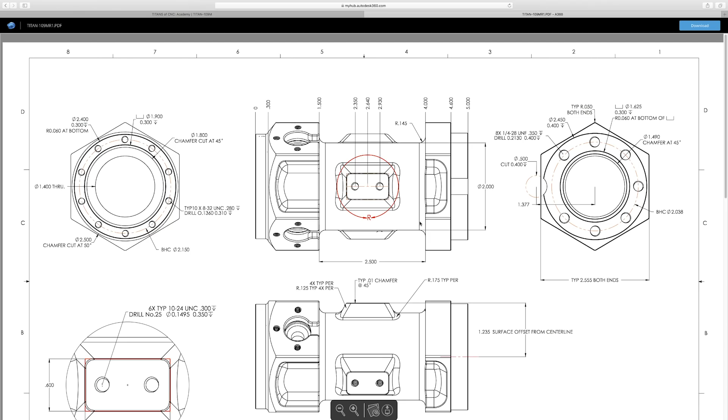So you'll want to go ahead and download the drawing, and you just simply click on the PDF. It'll take you to the Autodesk 360 site, and there your print will be. So once you have that, we can come over to Fusion, make sure we're in our model space, and I'm just going to start off with a new file or new design.

First thing I'm going to do is start a sketch. So I'm going to come up to Sketch, and I'm going to use the polygon tool, and I don't really care which one I use right here of these two. I'm just going to go with the top one. And I'm going to create this on the right plane, which is this one here. If you look up at the cube, you have the right plane, front, top. So I'm going to go with this right one here.

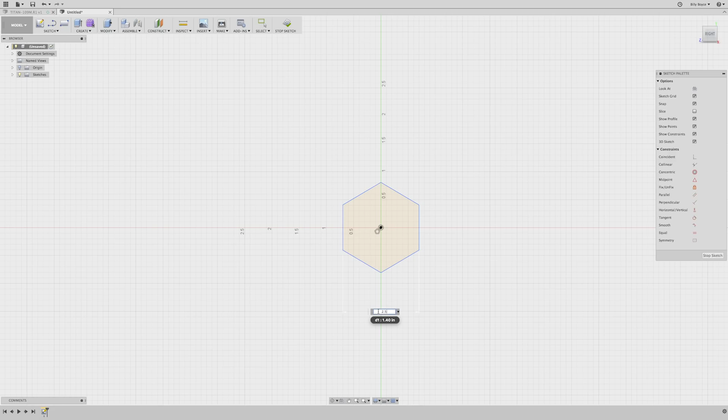I'm going to start right in the center, and I'm just going to click and drag out. And I'm going to drag out to the left or the right because I want the point to be at the top there, just like the print. And I'm just going to click. And then I'll press D for dimension, and I'm going to do a dimension across there, and we have a dimension of 2.555. Enter.

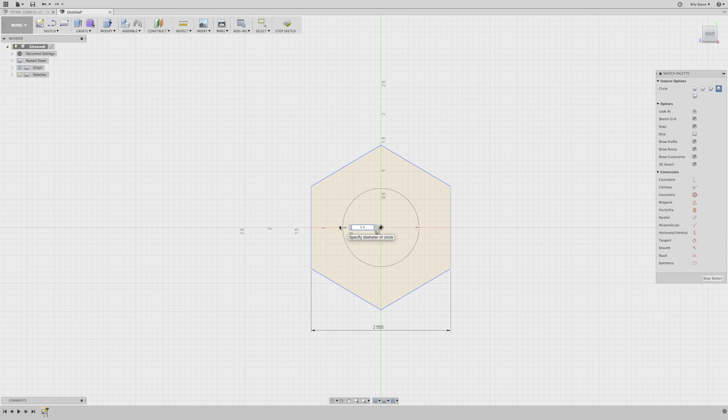I'm going to press C for circle, or you can come up to Sketch, center diameter circle. You can also add that quick draw up there to your ribbon. I'm going to press C for circle. And now I'm going to do the through hole. So that's 1.4. Enter. Enter again. And then we kind of have that shaved down section in the middle, which was 2 inches.

So I'm going to press C for circle again. Click right there. Type in 2. Press enter and enter again. And then I'm going to right click, press pull. I'm just going to take those 2 sections right there, and we have an overall length of 5 inches. So I'm going to say 5. Enter.

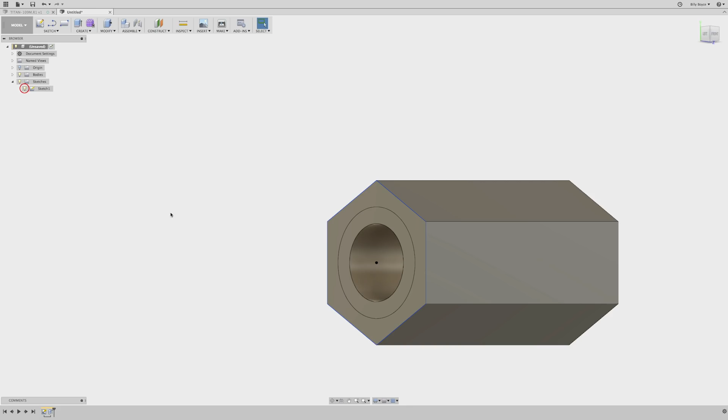And we had done a few of this. We did the next cut that we're going to do in that sketch, and it just disappeared. So to get that back, we'll come over here to the left, click that little drop down under sketches, and you see that light's off. We want to turn that light back on. And now there's our sketch again. So now we'll right click, press pull. I'm going to choose that section right there.

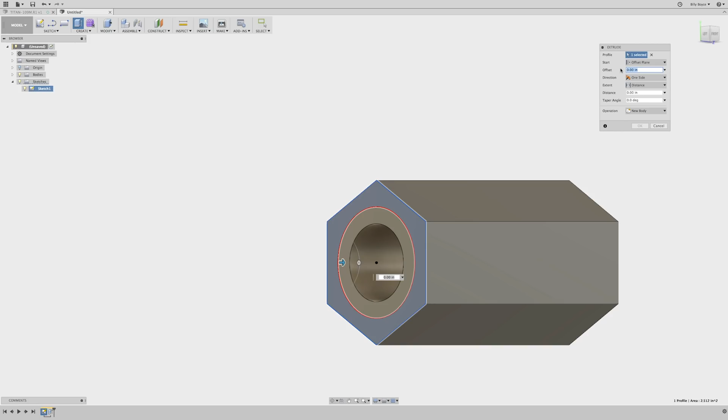And we come over here to our extrude menu. And instead of starting on the profile plane, which is where we did the sketch, we're going to offset it to be down here at the 4-inch mark. So we'll just say offset plane. We're going to offset it to -4. Whoops, we'll just say 4 then. And then the distance is going to be 2.5, and that wants to be a negative. Then we just say OK, and now we've got that cut there.

Go ahead and turn that sketch off, and we'll start another one. So I'm going to press C for circle. I'm going to choose that surface. I'm going to snap right in the middle, and I'm going to do that other outside diameter of this flange here. So it's going to be 2.4. Press enter, enter again.

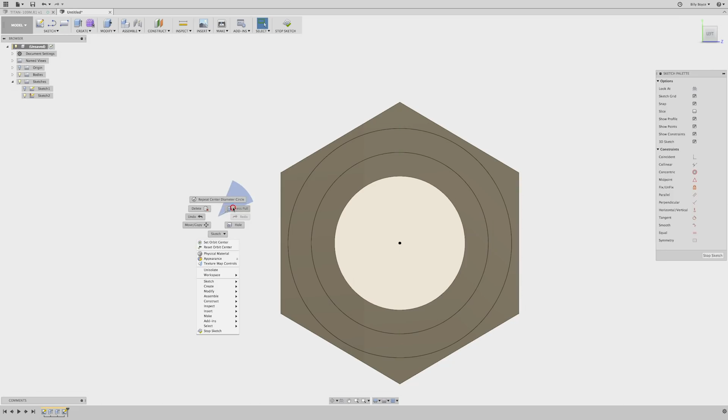You can press C again, or you could even right click and just say repeat circle, because that's what we're doing. That's going to be the 1.9. Enter, enter again. We can go ahead and right click, press pull. We're going to do this section, and we can do this inside section. They are both minus 0.3. And you can just go ahead and type minus 0.3, or you can come over here, highlight this box, minus 0.3. And then you'll see we got that cut there.

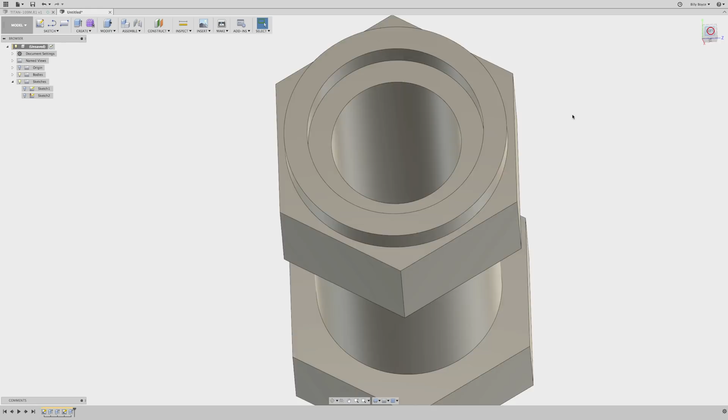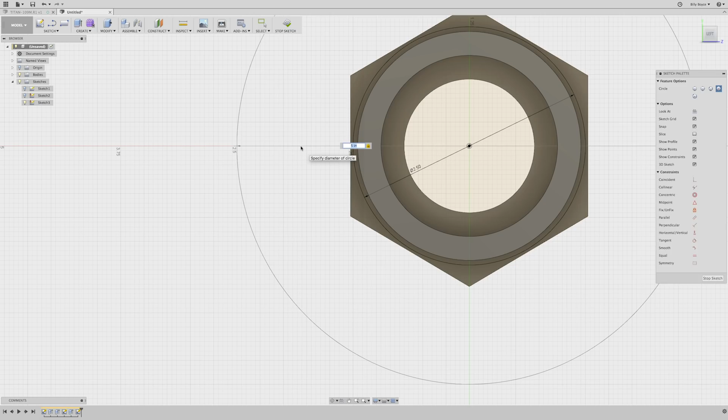We have a taper out here on this hex. So we'll go ahead and press C for circle. Going to select that surface. And that's going to be a 2.5. We'll say enter, enter again. C for circle. I'm going to go 5 inches. Then we'll right click, press pull, select that whole circular area. We want to make sure we're getting that involved.

We'll say minus 0.25. We'll press tab, which will take us to our taper angle. And we'll say minus 50. Press enter. And now we got that cut there like that. There's a fillet here at the bottom, so I'm just going to press F for fillet. Select that bottom one, and that was a 60 thou, 0.06. Enter.

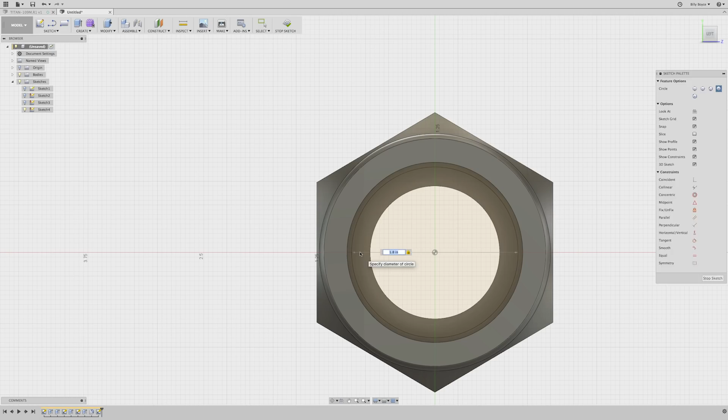We have another tapered cut on the inside here. So I'm going to press C for circle. I'm going to choose that surface. Start right in the middle again. And I can see that's a 1.8. Enter, enter again. I'm going to right click, press pull. I'm going to choose that whole area. I'm going to say minus 0.25. And then I'm going to tab and say minus 45. Enter, and there we go.

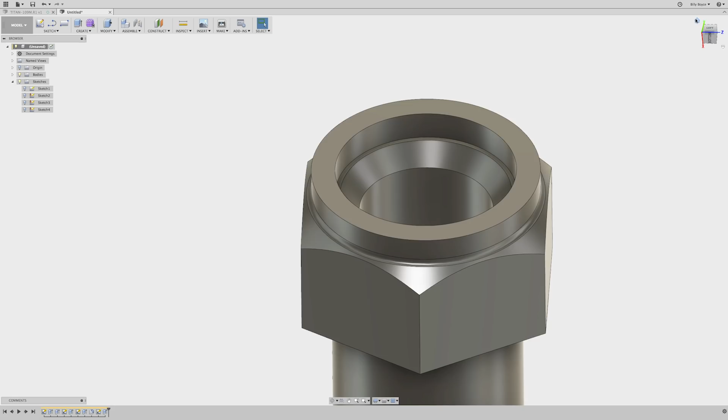So now we need to do the bolt holes on there. So let me kind of reorientate us here. Okay. Press C for circle. I'm going to choose that surface. Click right in the middle. And we have a bolt hole circle of 2.15. Enter, enter again. And it's not necessary for me to do this, but I just have a habit of doing it. I'm going to click this circle and press X. That's just going to turn it into a dotted line.

Now we're going to go to Sketch, Point, and what we're going to do is place a point for our bolt holes. So I'm just going to snap it right here, and then I'm going to use some constraints to get it where we want it. First thing I'm going to do is the coincident. I'm going to do that dot to the circle, and then I'm going to do a horizontal vertical with that and that one, and that puts it straight up there, and that's where we want it. So now we can go ahead and create the hole and threads.

So we'll go to Create, hole. Just going to go ahead and pick that spot. You see the dialog box come up, and when I hover over it, you can see it says depth. So first thing we want to do is the depth. That's going to be a 0.310 deep, and then we can press tab, and that'll change to the diameter, and the diameter is 0.136, and then we can just press enter.

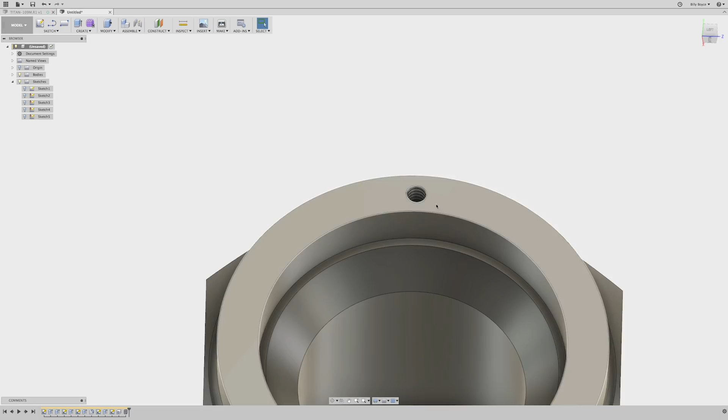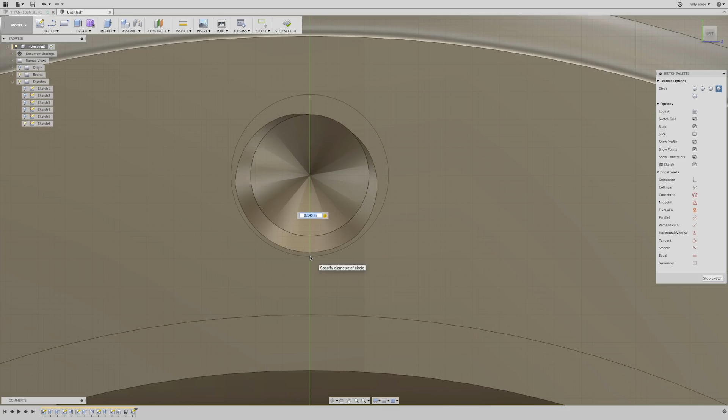And now we want to do a slight chamfer around that, just kind of a nice lead in. So we're going to press C for circle. We're going to choose that surface. I'm going to go right to the center of that hole. It'll kind of snap to it, and I'm going to drag that out. And let's see. We'll do a 0.145. Enter. Enter again. We can right click, press pull.

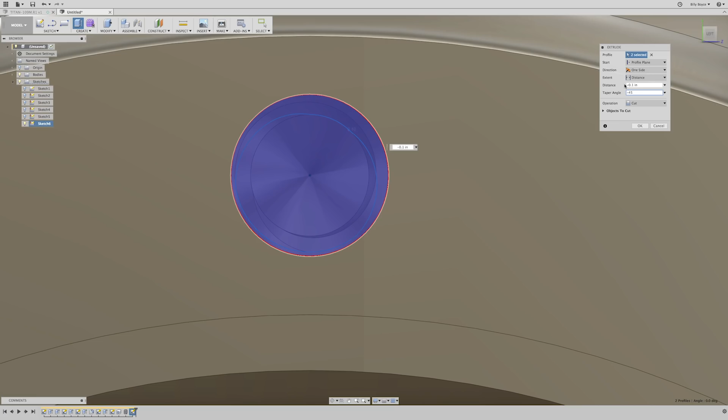It automatically selected this inside area because that's where we were when we right clicked. And then we can select that other piece to create a full circle. We can say the distance is going to be minus 0.1. We're going to tab and say minus 45. And that kind of just simulates a nice little chamfer all the way around there.

So the next thing we're going to do is make our copies all the way around. So the way we do that is we're going to go to Create, Pattern, Circular Pattern. We want to change this little menu here, pattern type. Let's change it to features. That drilled hole, the threads, and that 45 are all features.

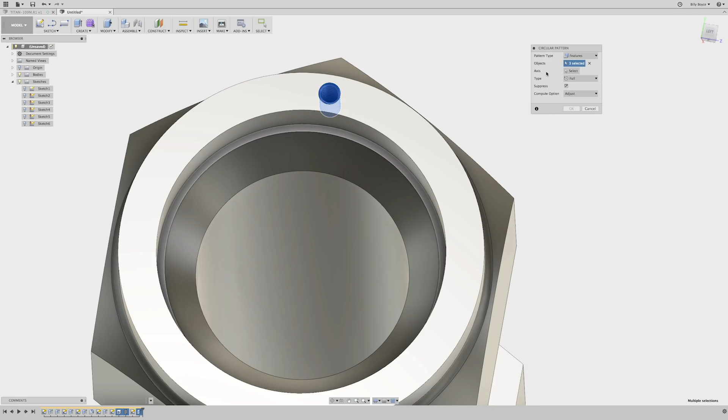So once we selected that, the next thing highlights, it wants us to know what objects. So we'll come down here, we'll choose our hole, we'll choose the thread, and we'll choose that chamfer. We'll come over to axis and select that box. We can use this red line, or you can also choose a circle, and it'll choose the center of that circle. And since this is a bolt flange based on that circle, it's real easy to just go ahead and select that circle.

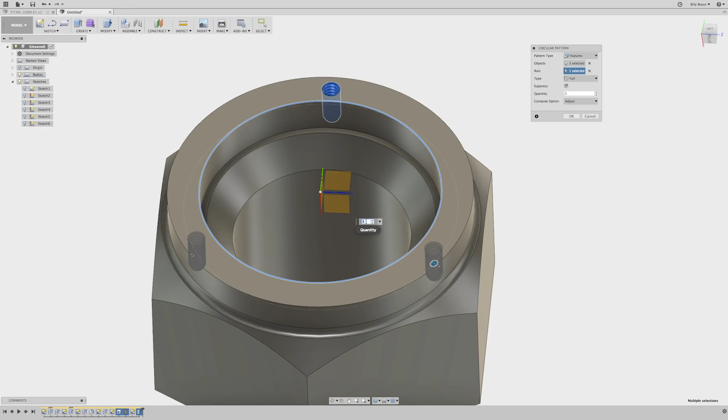The next thing that pops up is the quantity, and you're automatically selected in there. You can instantly just type. You don't have to go select anything else, so you can just type in 10. Press enter. And now you have all those threaded holes with your nice chamfer on there. I believe that is it for this end. So we'll go ahead and hop over to the other end of it.

Trying to keep our orientation straight. So you should be able to come over to the front and just pick that corner, pick the right. Nothing will rotate or turn. You should be good to go. So we'll go ahead and start some more sketches. So we're going to press C for circle. Choose that surface. Click right in the center, and we'll do that major diameter there of 2.45.

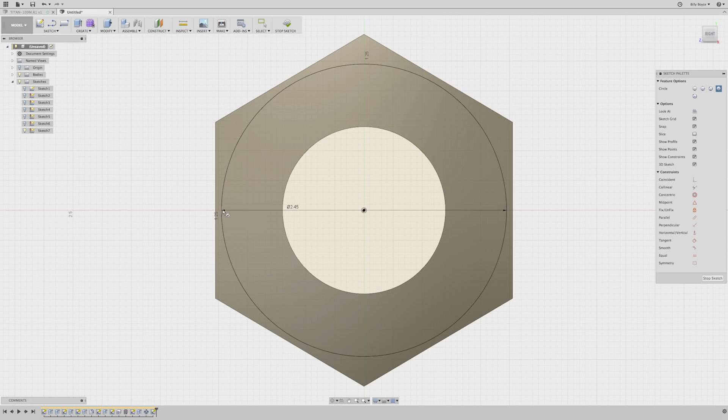Enter, enter. C for circle. Now we're going to do the 1.625. Enter, enter again. We can go ahead and do our bolt flange. So C for circle, right in the center. Our BHC is 2.038. Enter, enter again. And here's the reason why I like to go ahead and turn that to a dotted line, because now I'll know. Just ignore that circle. That's not going to be used for anything other than that bolt hole circle. So I'm going to just select it, press X, and now it goes out of the way.

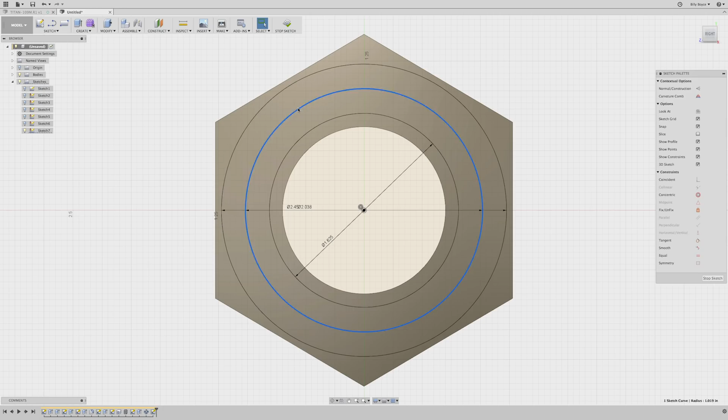You can also notice when I hover over this area, you kind of get that different color, and it's in those two circles. Well, when this is a solid line, it breaks that up. So sometimes if you're going to extrude something, that'll just mess it up, especially if the only thing you're using it for is a location. So I just turn it to a dotted line, no issues. Let's go ahead and place our bolt point. So we'll go over to Sketch, Point. You can attach it to there, and it automatically adds the coincident constraint. But now we can do the horizontal vertical, because again, we want this one straight up.

Okay, now we can use this sketch and start doing something. So I'm going to right click, press pull. I'm going to choose that right there. That will be minus 0.4. Enter. And you'll notice again our sketch disappeared, so we can just come over here to our sketch on the left, and we can turn that light bulb on and we'll get that sketch back. So now I'm going to right click, press pull. I'm going to choose that one, and that is minus 0.3.

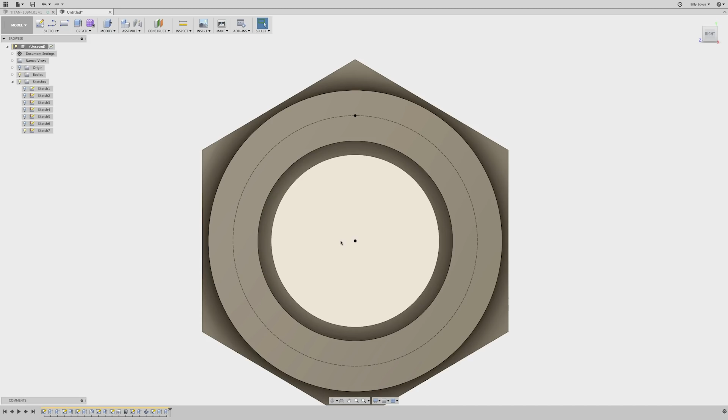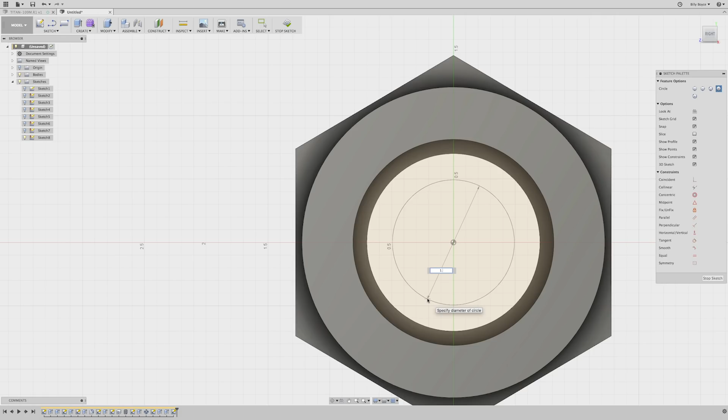Enter. And then we have another circle, it looks like, so we'll press C for circle. But actually, first thing we need to do is hit escape, get out of that, and we'll have to turn this sketch back off because it won't let us get past. See that? It stays up there. So we'll turn that off real quick. C for circle, click down there, start in the center again. That's a 1.49. Enter, enter again. Right click inside that circle. Select that other circle. Say minus 0.1. Tab, minus 45. Enter. And now we've got that little chamfer in there.

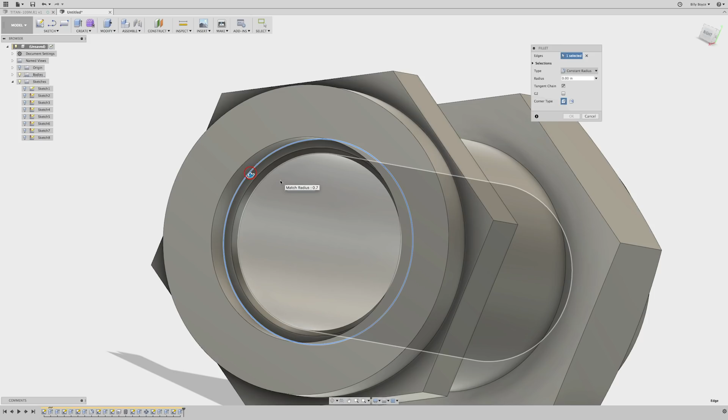There's also a fillet right here, so F for fillet. Select right there. It's a 60 thou, yeah, 0.06. Enter. And now let's go ahead and add that bolt hole. So we'll turn that light back on. Sketch number 7. We'll go Create, Hole. I'm going to choose that point. It is a depth of 0.4. Tab. The diameter is 0.213. And enter.

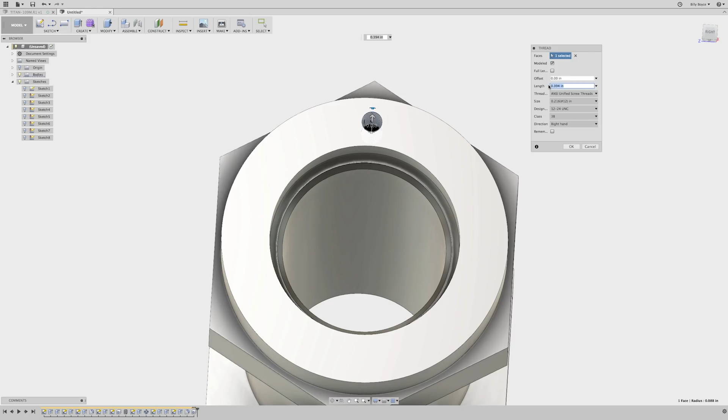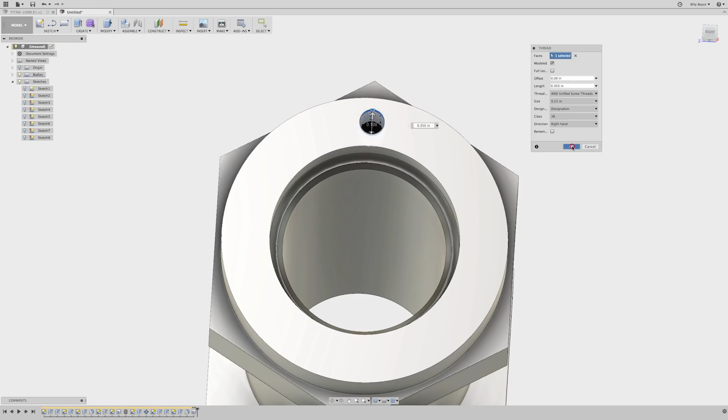We can go ahead and turn that sketch off now. And we'll go to Create, Thread. We'll select the wall of that hole again. Yes, we want it modeled. No, we don't want it full length. We want no offset. The length of the thread is going to be 0.350. The thread type is a 1/4-28. So we'll come over here to size. We'll do this drop down and we'll go down to 1/4. And then we'll change this drop down to 1/4-28. Then we'll just say OK. And there we go.

So again, let's do that chamfer lead in. So we're going to press C for circle. Choose that surface. Go right to the middle.

So I'm going to hit escape. It started editing an older sketch, it looks like. No? Oh, something weird happened here. Stop the sketch.

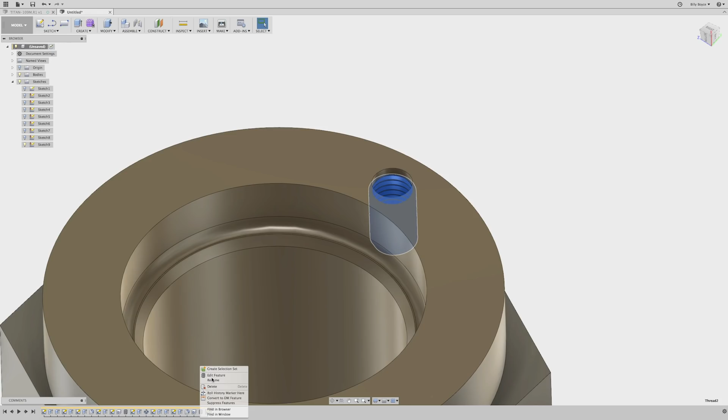So sometimes I've had this happen. So what we'll do is go back to this thread, say edit feature. And for some reason, it's starting at the bottom and working its way out. I do not know, that just happens. I have that happen sometimes.

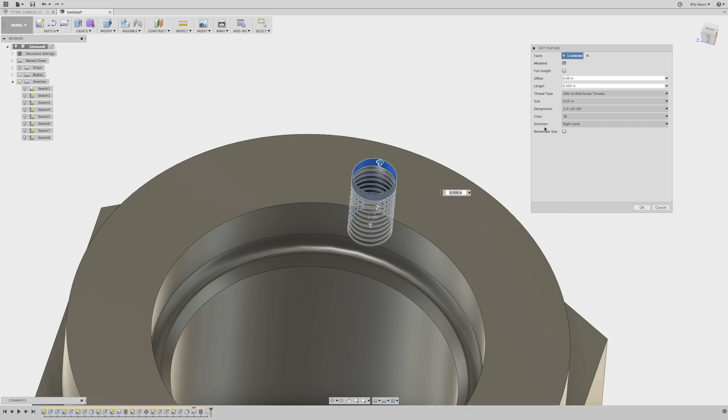So I'm going to try to select it again, turn off full length, and see it's doing that again. And there's no flip direction. So what I'm going to do is cancel this. What I've had to do to fix this before, I don't know why it did that, I just delete it usually, is all I have to do.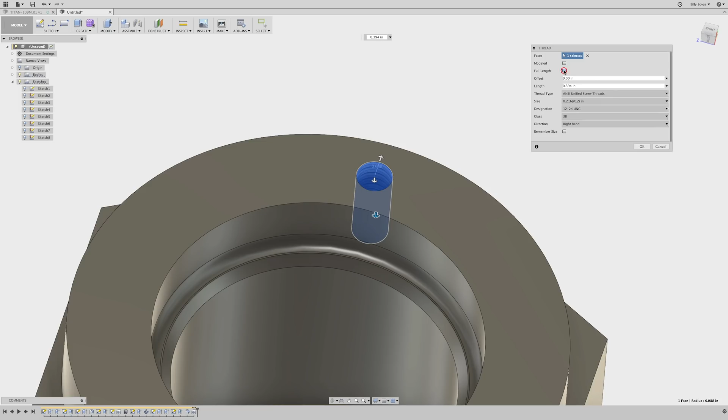The hole was fine. So now we'll go create, thread, pick that wall. Don't want it to be full length. I want it modeled.

350 for the thread. Okay, see, now it's working. So if anybody ever has that happen, just delete that thread from your timeline down here and do it again, because you can't make any selections to fix it. If anybody knows why that happens, please let me know.

So that was a size of 1/4. Designation was 1/4, 350 deep, modeled. We'll say OK.

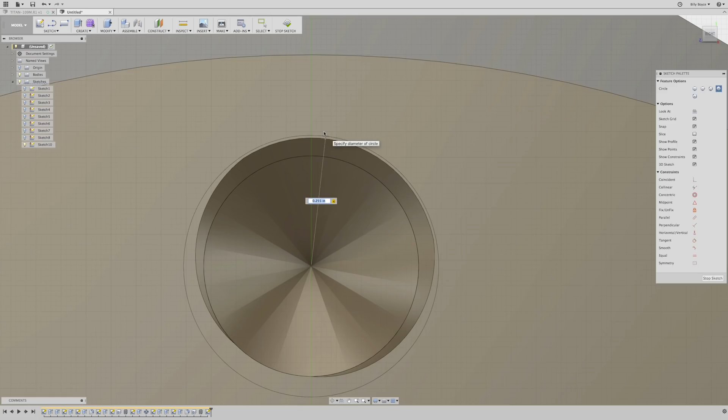And we'll go ahead and create that sketch for the chamfer now. So I'm going to press C for circle. I'm going to click that surface, snap right to the middle, drag this out, and let's do a 255.255. Enter, enter again. Inside the circle, I'll right click, press pull.

I'll choose that section as well. I'll just say -0.1, tab, -45. Enter, and there we go.

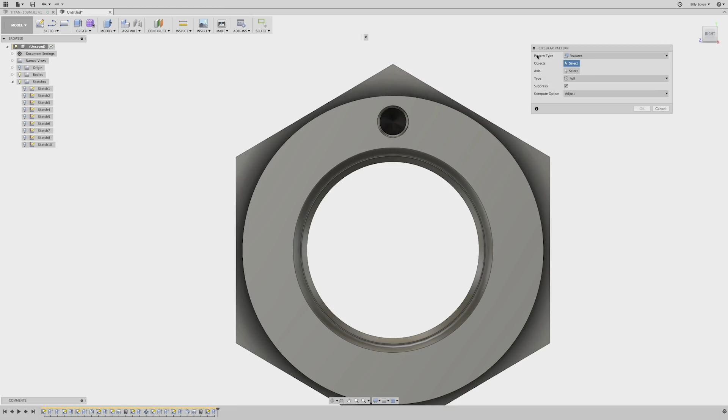Now we're going to go ahead and do the rotations again. So we'll go create, pattern, circular pattern. It's still selected on features, so we'll choose the hole, the thread, and the chamfer. We'll select axis, and we'll just select one of our circles. And it says 8 times.

So we'll do 8 times, but we can look at the print and know right here we have this little cutout. Now we did 8 times on the print just so you can get the right spacing. And then here you just click that check mark and it won't add that hole, but it keeps the spacing the same. And then we just say OK.

So now we'll add that little cutout right here. Press C for circle, I'm going to click right here. It's a 1/2 inch, 0.5. Enter, enter again. I want to get it in line with the center point here, so we'll just go horizontal, vertical. I'll click right here, and I'll click right here.

And now all I have to do is add the dimension from center to center. So D for dimension. I'll click here and here. That is a dimension of 1.377.

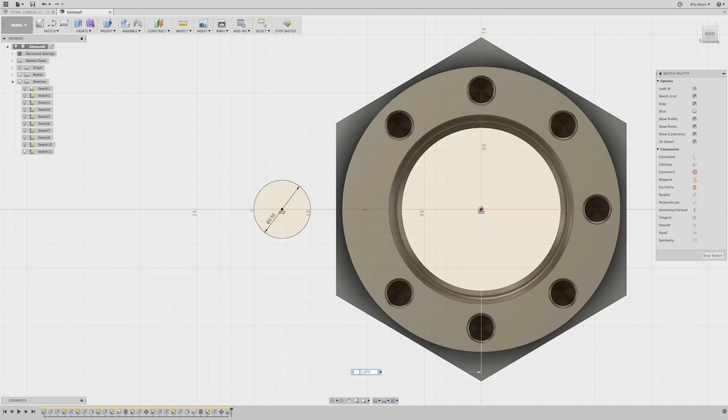Gonna right click, press pull. I'm gonna choose this and this, and I'm gonna say -0.4. Enter, and there's our cut.

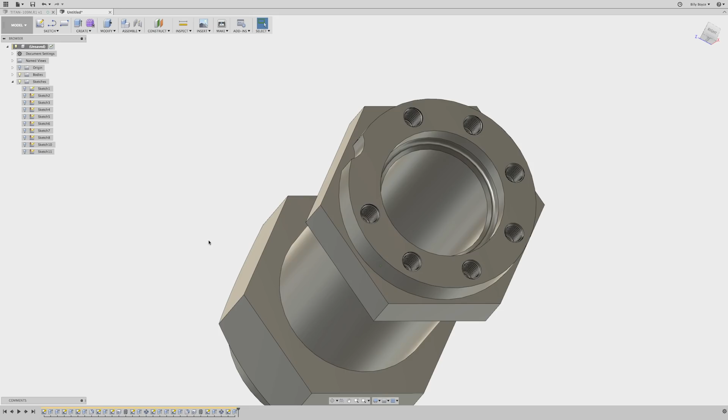And I'm gonna wait to the end to do a lot of our edge chamfers because there's a bunch of them, not a bunch of them, but we're gonna do some. So let's just do it all at once.

Real quick, let's go ahead and do this corner radius. So I'm gonna say F for fillet, go here and here. That's a typical 50 thou, 0.05. Enter, and there's a couple ways you can do this.

I could have went around and selected each one, and that's fine. But I'm just gonna go do it real easy. I'm gonna just do those.

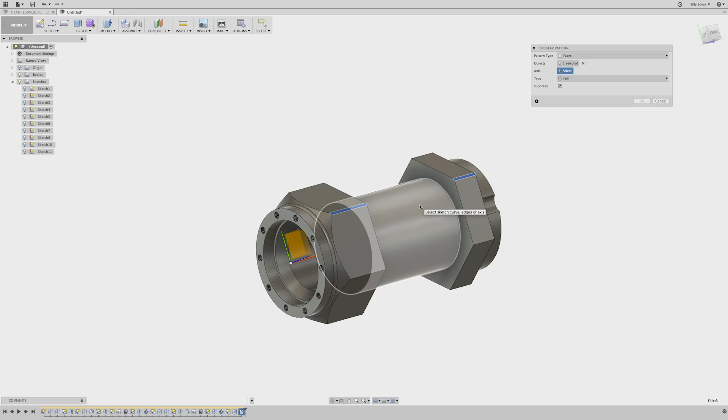Create another pattern. Leave it on features. Actually, I want to change it to surfaces or faces, and I'll just select that fillet. Select axis, select that. We'll say 6 times. We'll say OK. And so that just threw those fillets on all of them.

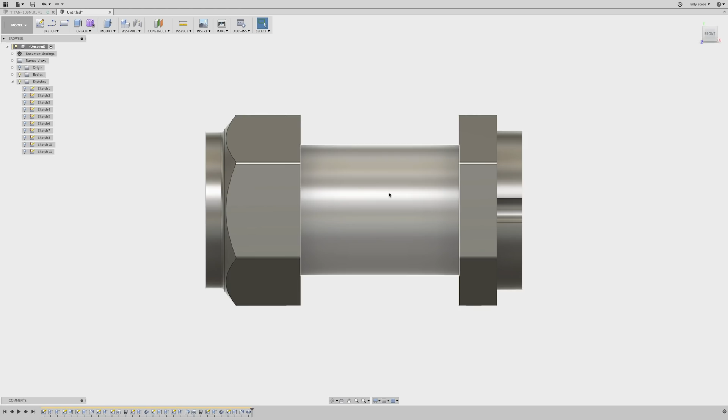So looking at the print, it looks like we can do this boss here that's on the side. So what we'll do is we'll go to offset plane, and we'll come over here to the left and turn on the origins light.

We'll select this plane, which is the front plane, and we have an offset dimension of 1.235. Say enter.

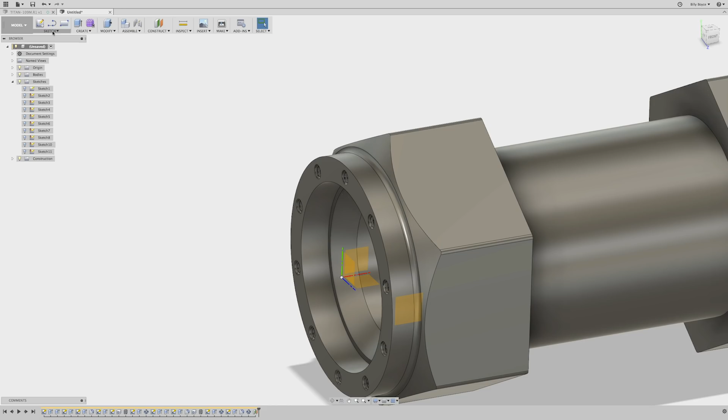And now we're going to just sketch a rectangle off of that. So we'll go sketch, 2-point rectangle. We'll select that plane, and I'm just going to real quickly just drop a rectangle. I'll press D for dimension. And we have an overall of 0.6 and a length of 1 inch.

So we can select that edge and that center point, and it's basically half, so 0.3. We'll have to add a point here, so we'll go sketch, point. We'll snap to the middle - you see that little triangle? That means you're in the center of that line. I'll press D for dimension, go from that point to this point. That's 2.640.

And then we also have 2 more points here, so we'll go sketch, point, real quickly, just slap a couple of them down. We want these 2 to be horizontal vertical with each other, and horizontal vertical to this center point right here. And then we'll add dimensions, so D for dimension, from here to this point, 2.35. From here to here, 2.93. Enter. We'll say stop sketch.

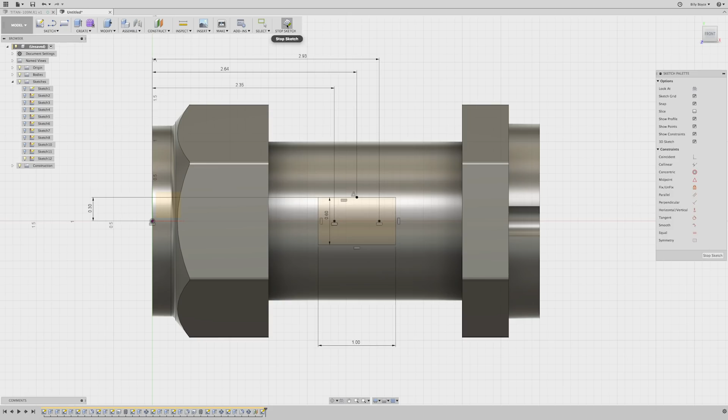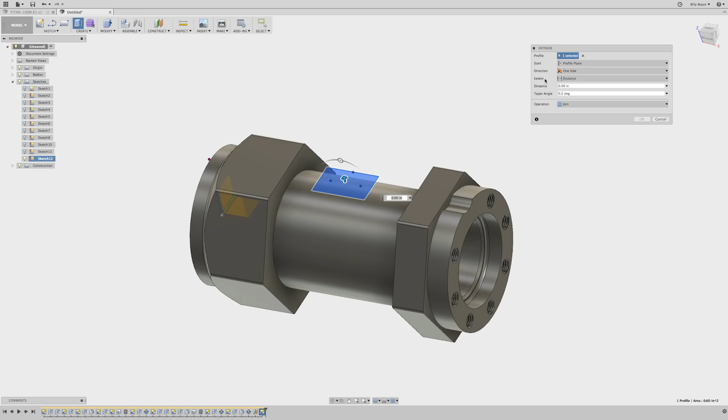We're going to right click, press pull, select that rectangle, and we can kind of just rotate it a little bit here. We're going to join, and over here we'll say, on the extent, to object. Go ahead and select that object. Then we'll come over to taper angle, and that will be minus 30 - no, just 30, 30 degrees. Then we can say OK.

We'll press F for fillet, select those 4 corners. Those are a fillet of 0.125. Enter. We'll press F for fillet again and do this bottom. That is a dimension of 0.175. Enter.

Now we're going to put the chamfer around the top, so we'll go modify, chamfer. Click right there, and that is a 10 thou, 0.01.

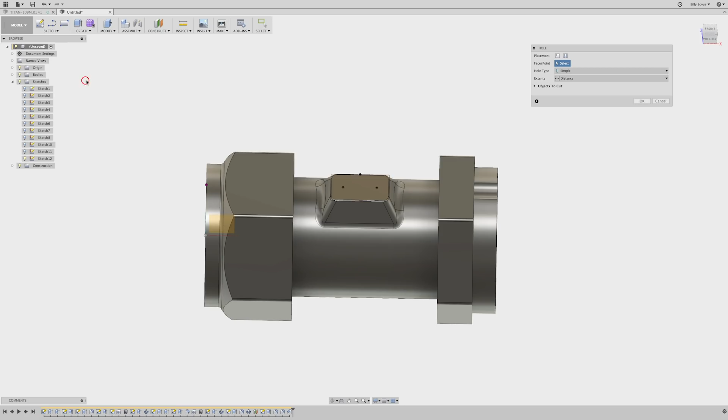Let's go ahead and turn that sketch back on, and we'll create the holes. So create hole, we'll click that point, this point. We have a depth of 0.35. We'll tab, and then a new dimension of 0.1495. And we can just press enter, and we're done.

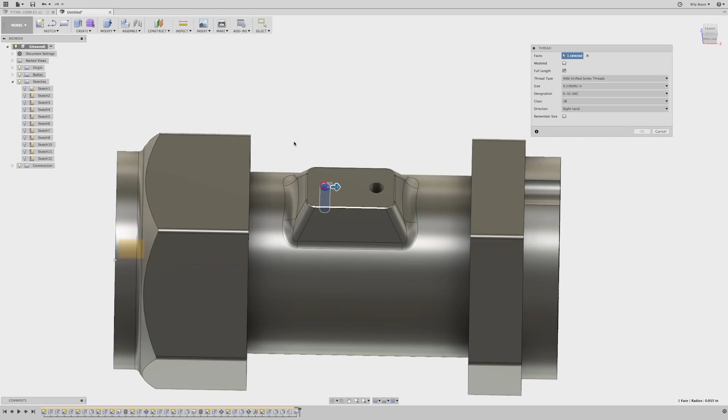Go ahead and turn that sketch back off, and now we'll add the threads. So we'll go thread, create thread. We'll select that wall. If you're using a Mac, it'll be Command - you'll hold Command and select that wall. If you're on PC, it'll be Control, and that way you can just select both of those.

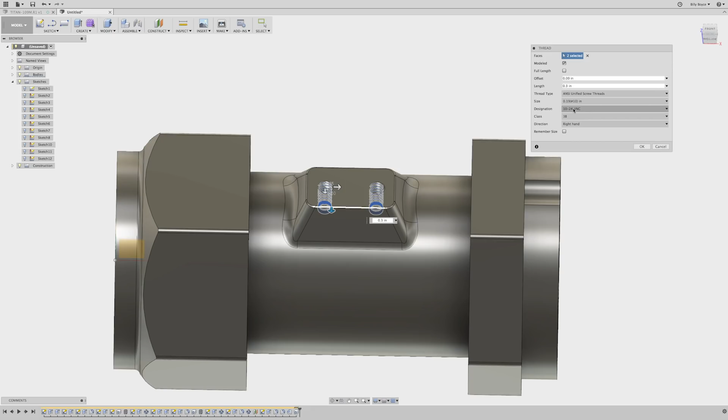We'll go ahead and model them. We don't want them full length. We have a depth of 0.3, a size of 10-24, so number 10, and it defaults to 10-24. So then we'll just say OK.

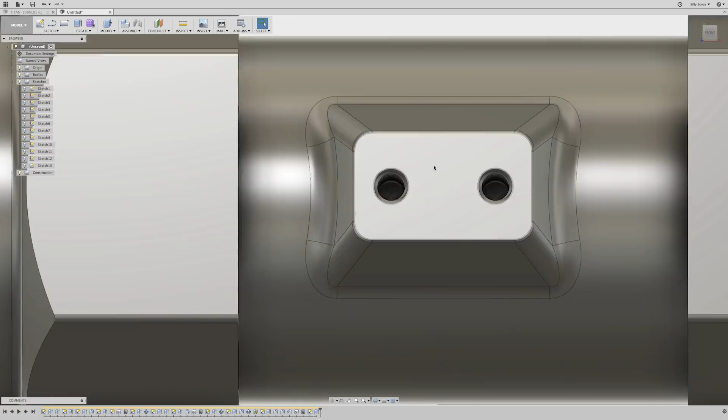And let's do our chamfer lead in again. So C for circle, we'll choose that surface, and we'll just click in the middle and drag out. 200 looks like a great number - 0.2, enter, enter. Inside one of these circles, we'll right click, press pull. We'll make sure the circle is fully selected. We'll say minus 0.1, tab, minus 45, enter. And there we go, that boss is complete.

That should be everything for the first print, page number 1 or sheet 1. We can now move to the next one.

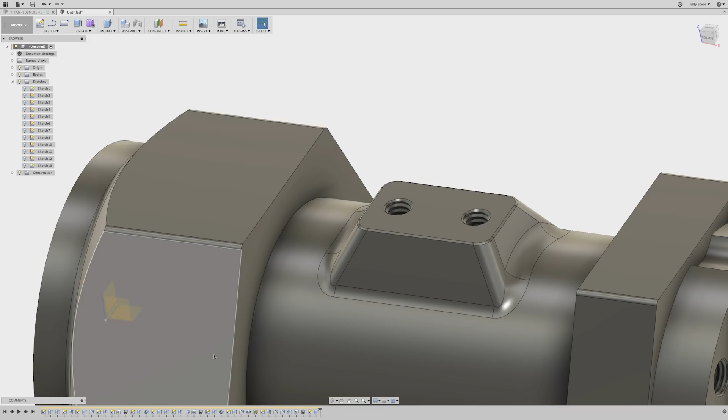And here we'll do those big side cutouts and that hole on the side. Let's go ahead and do the hole on the side. Actually, first thing I want to do, real quick, just to make life easy, I'm going to come down here and I'm going to select all of these. So I'm going to hold down Shift.

So there's our first extrusion with that taper angle. I'm going to click there, hold Shift and go all the way to the end, and that's that whole entire thing. What I'm going to do now is right click and just create a group. That way we're going to end up revolving this, but we're going to do a couple more features and then we're going to just do everything at once instead of doing 3 different large revolves.

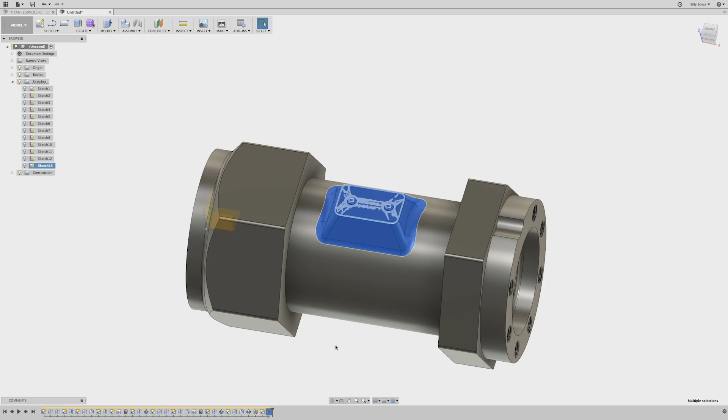So now we can go ahead and start. Let's do this lube fitting here on the side - it's going to be kind of rotated. So I'm just going to press C for circle. I'm going to choose that surface.

I'm going to click right here, and that's a diameter of 0.625. Enter, enter again. I want that in line, so I'm going to do horizontal vertical between that point and this point. I'm going to press D for dimension from here to here.

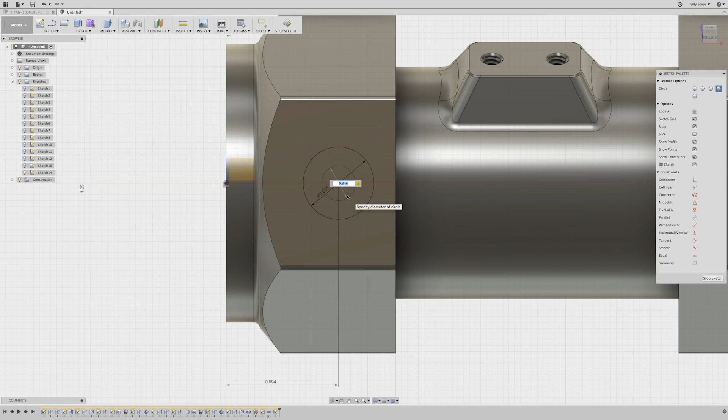0.994. Enter. I'm going to press C for circle, go right to the center again. That's a 300.3. Enter, enter again. Now I'm going to press L for line.

Here I'm going to do a tangent line off of this circle. I'll click it and hold, and drag, and you'll see that tangent symbol, then just drag it out. I don't care if it's crooked, just so you see it. You can also do it straight, but the way you fix that real quick is to come over to horizontal vertical and select it, and it'll straighten it out. I'll do that to this one too, just to make sure.

We also have another cut. This is the counter bore, this is the through hole, this is that groove, and then we know we have kind of like an O-ring groove or cut in there. So let's go ahead and sketch that now.

We'll press C for circle. I'm going to go right to the middle again, and I know it's a little bit bigger. So that's 675, 0.675. Enter, enter again.

I'm going to right click inside the little circle, press pull. I'm going to rotate this model around, and change this extent to object. I'm just going to select the inside and it'll cut right to that surface. I'll say okay, and that is good.

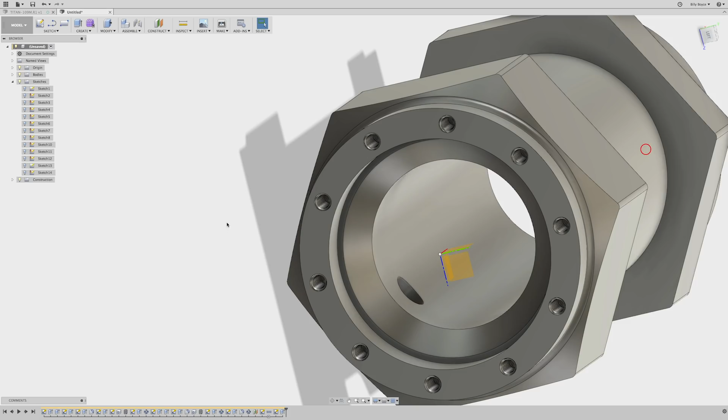Again, our sketch disappeared. We still have this open and set up, so we can just say select, let's select that point. Now I'm going to right click, press pull. I'm going to choose that section. That will be a depth of -0.3. I'm going to press enter.

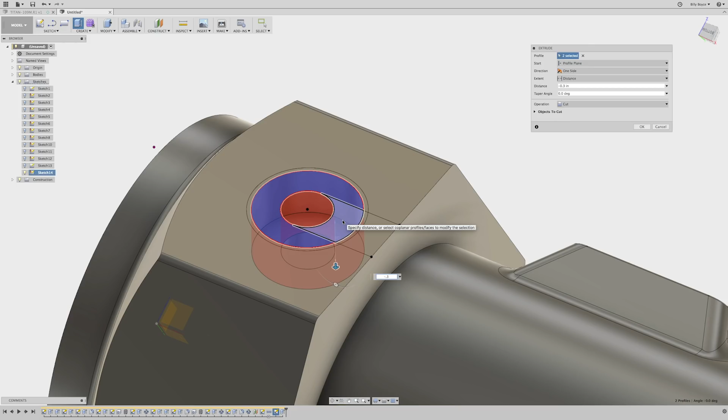I'm going to right click, press pull. I'm going to choose this and that. That is a distance of -0.15. Enter.

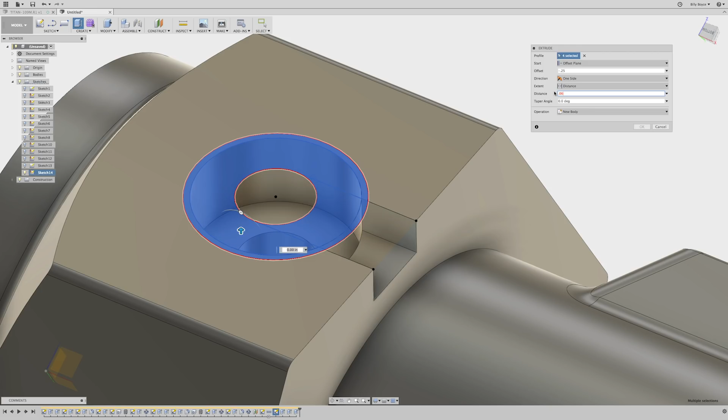Now we're going to do that key cut in there. We'll go right click, press pull, choose that section, let's get that donut. Under start, we'll say offset, and we're going to offset that -0.25. Then the distance is going to be 65.065. Enter.

And there we go, so we can turn that sketch off now. Press F for fillet, I'm going to select there and here. That's a radius of 0.125. Enter. F for fillet again, here and here. 0.05. Enter.

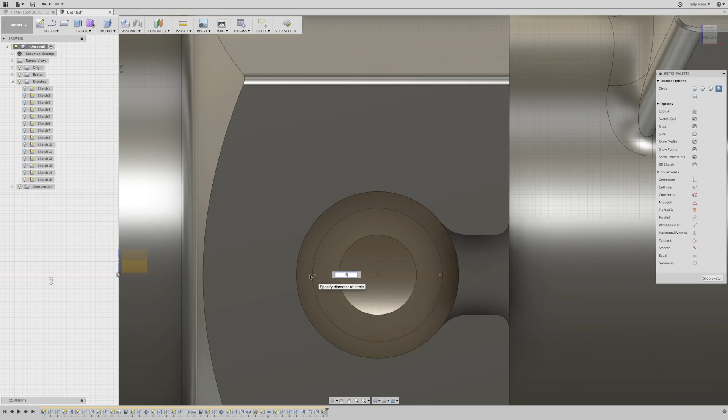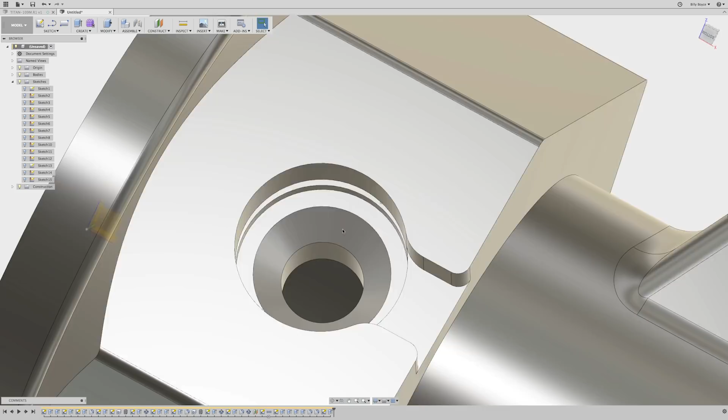Now we have to draw there's a little chamfer down here at the bottom. So we're going to press C for circle, select that bottom surface, snap right there in the middle, drag that out, and that is 0.5. Enter, enter again. We'll right click in that small circle, press pull, select this other circle. We'll say -0.25, then tab and say -45. We'll press enter, and that'll give you that nice big chamfer.

So now we need to add the bolt holes around this cutout here. I'm going to press C for circle, choose that surface, snap right to the middle and drag that out. Our bolt hole circle is 1 inch. Again, I'm going to click it, press X, get the dotted line there. We'll go sketch, point, just snap it to the circle. Come over here to horizontal, vertical, snap the center, snap that. And then we could say stop sketch.

We're going to go create, hole. I'm going to select right there. That is a distance of 0.31. Going to tab and go 0.135. I'll press enter.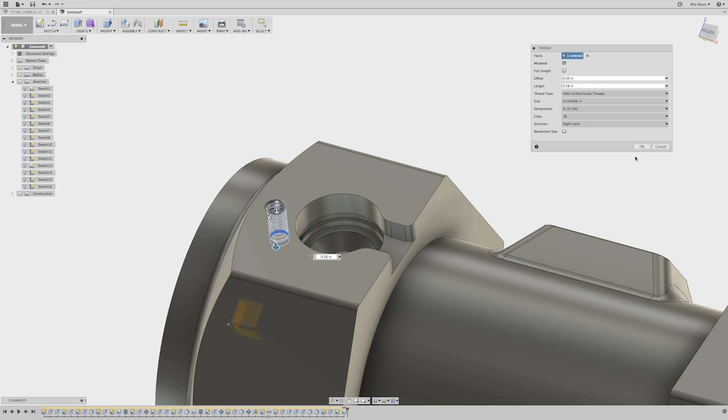And we'll do the chamfer relief. So C for circle, that surface, click right in the middle. 0.170. Enter, enter again. Right click inside the circle, press pull, select that other section. We'll say minus 0.1, tab minus 45, enter. And we got that all cleaned up.

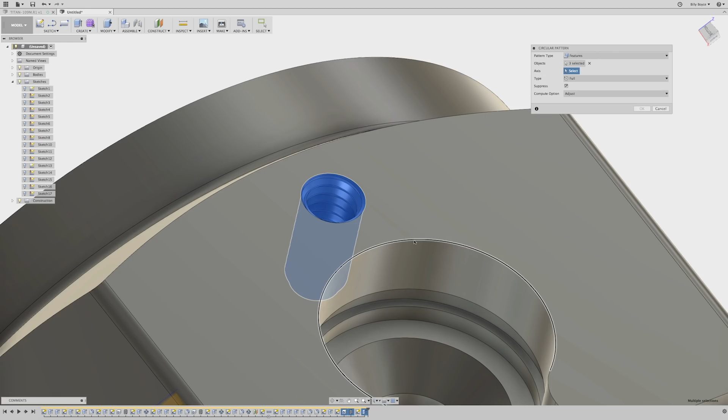So now we'll do a create pattern, circular pattern. We'll make sure that is on features. Going to select the hole, the thread, and the chamfer. We'll select axis, we'll do it around this circle here. We'll say 4 times, and we'll turn this one off. We'll say OK, and there we go.

I believe that completes this whole little section here. So we can go down here to our timeline. I'm going to go ahead and select our first sketch. I'm going to hold Shift and grab all of that, and then I'll right click and create a group.

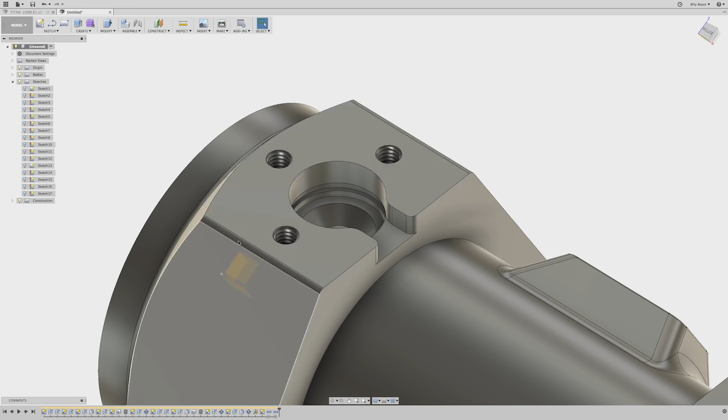Now we can go ahead and do these side cutouts here. We'll go up to Sketch, choose Rectangle, and do a 2-point rectangle on this surface. I'm going to click right here and drag this out like that.

I'm going to press D for dimension, go from here to here, and that's going to be 0.5.

Half inch. Press D for dimension. I'm going to select right there. Our overall is 1.225. Go from here to here. That'll be 0.613. Enter.

I'm going to press O for offset, and make sure this chain selection is unchecked. We'll select that right there, and say minus 0.155. Enter. Then I'll just delete that line.

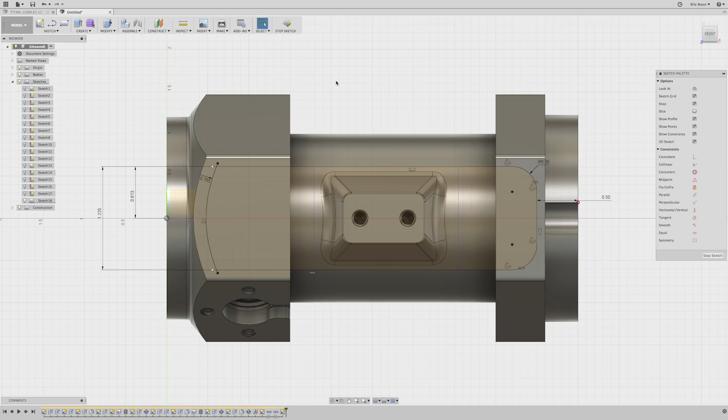We're going to press L for line, and throw a line here and a line here. We'll press D for dimension. I'm going to choose this point and that line: 1.95. Enter. Go from this edge to that line: that's 1.5. Enter.

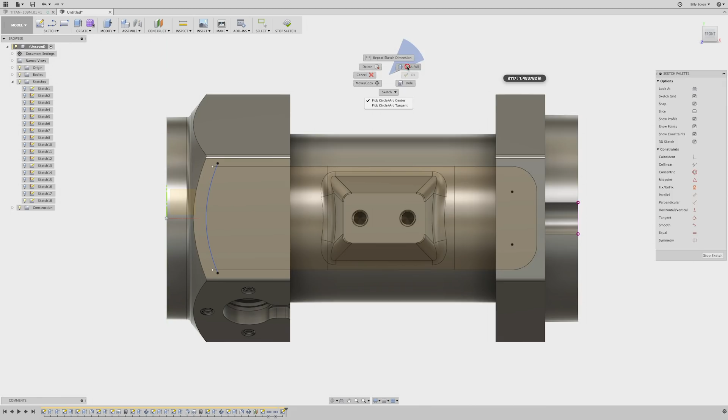I'm going to right click, press pull, and choose that section. Kind of rotate it here. I'm going to say distance, then to object, and click that diameter.

You can see it's cutting all the way through - don't want that. So I'm going to click this guy here, it says extended faces. Then I'm going to say offset 0.1 inch, or 100 thousandths, 0.1. You see that keeps that diameter but offsets away from it, which is exactly what we wanted.

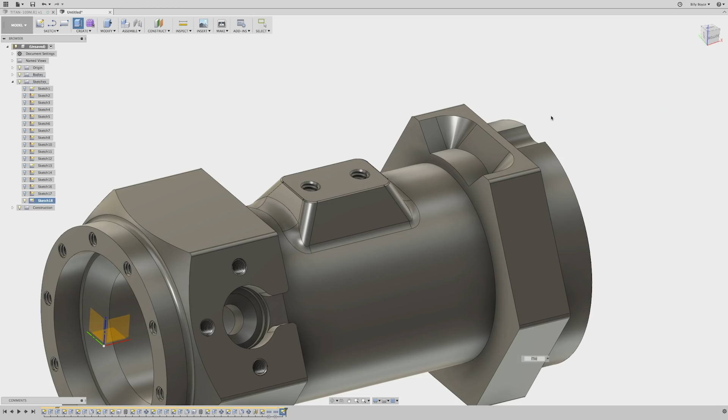Now the only other thing we need to do is add that taper angle, and we can see that was minus 45. Let me say enter, and there we go.

We lost our sketch, so we want our sketch back. We'll come over here and turn that last light bulb on, right click, press pull. We're going to do that section and this section, and again we're going to do distance, going to object.

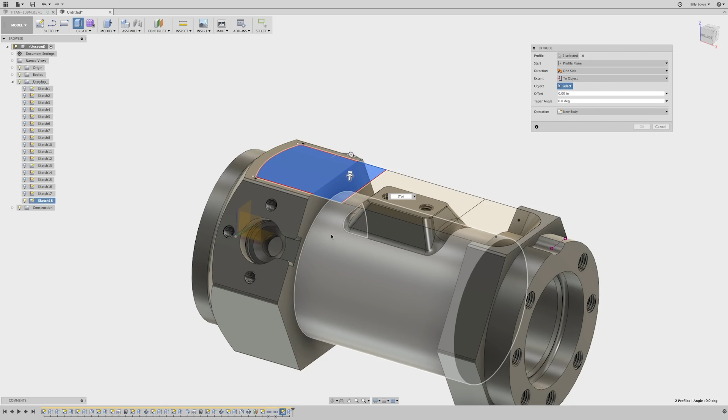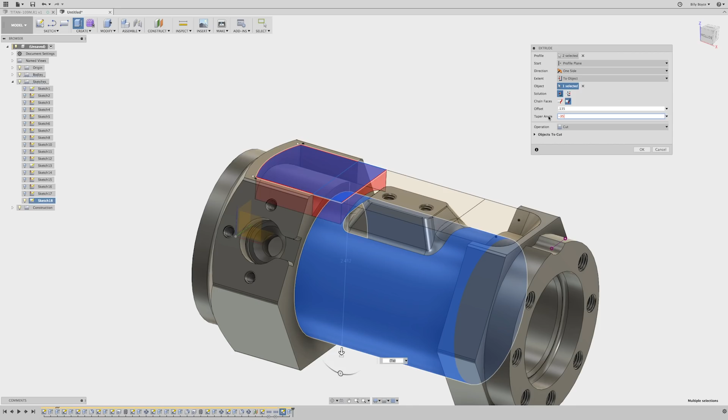Select that diameter, change that to that. We're going to say an offset of 0.135. We have a taper angle of 35 degrees, so minus 35. Then we can press enter.

Let's go ahead and turn that sketch off and add our fillets. F for fillet. Let's select that, this, that, and this. That's a typical 0.175. Press enter. And that feature is done.

So we'll go back down to our timeline here. Select that, hold shift, select that guy. We will right click, create a group, and you can come back and rename the groups whatever you want. So we have this feature done, this pocket on the side, and this boss.

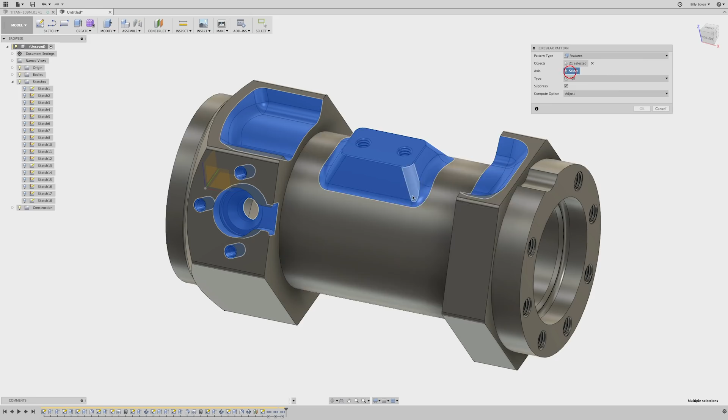Now let's go ahead and make the copies all the way around. We'll go create pattern, circular pattern. I'm going to leave that at features, select that one, and that one. We can say axis, and rotate around that. Give it a second, we're going to do it 3 times. We say OK.

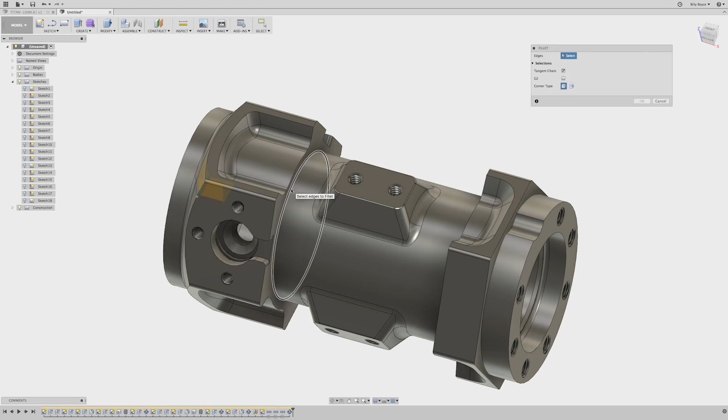And there we go. Let's go ahead and add our fillets to this base here. I'm going to press F for fillet, select here and there. That's a 145, so 0.145. We'll press enter.

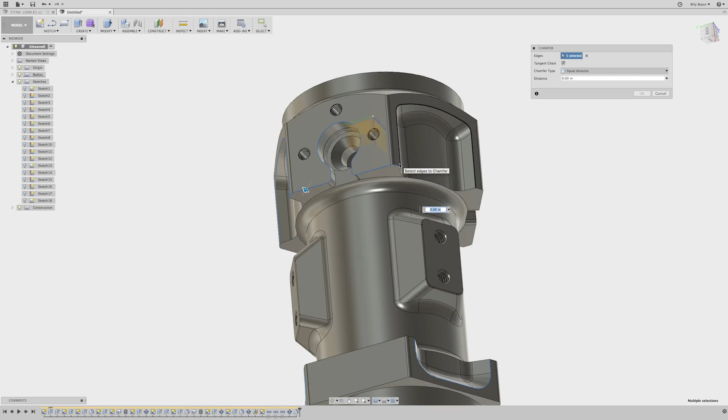Then we'll just do our 10 thousandths chamfers. We'll go modify chamfer. I'm going to select here, here, here, there - the inside and outside of our bolt patterns. And that's it, so we'll say 0.01, enter.

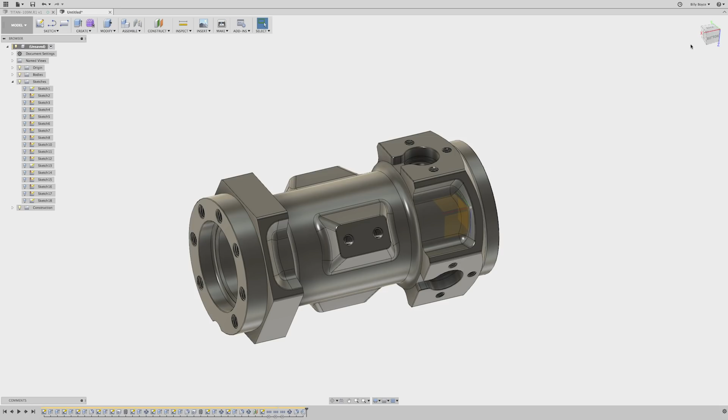Take a look at it here. Looks like everything is good. So there you go, that's the Titan 109.